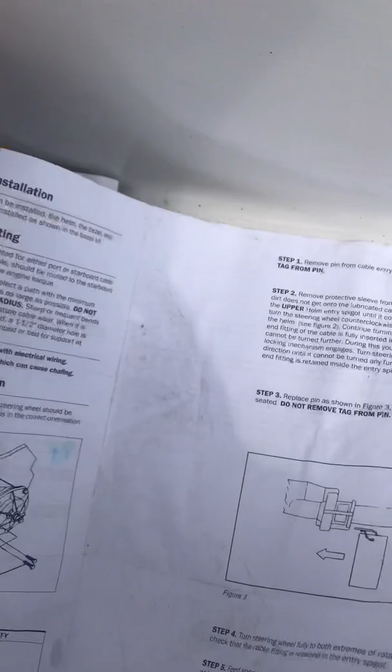Anyway, the instructions are pretty good. It's pretty straightforward installation. You put in the bracket, put in the helm bracket, but where I had trouble was getting the cable to lock into the steering mechanism. There's a pin, and the instructions on the insertion of that pin are not very clear.

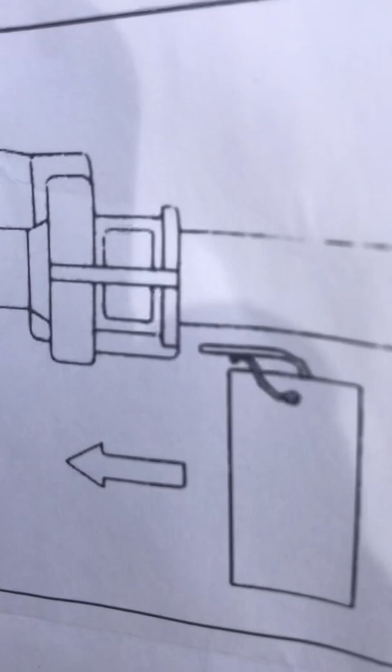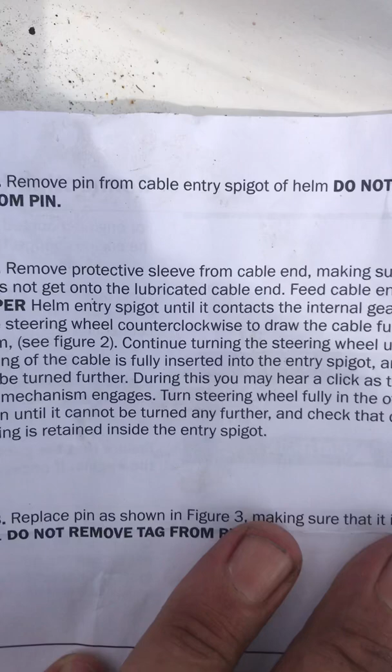But here in step 2, we read: during this procedure of pulling the cable into the helm box, you may hear a click as the locking mechanism engages.

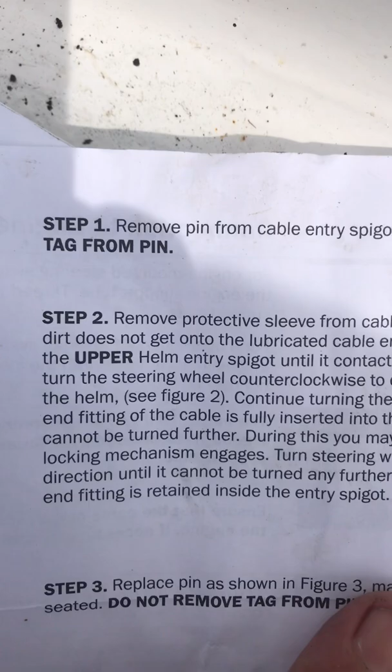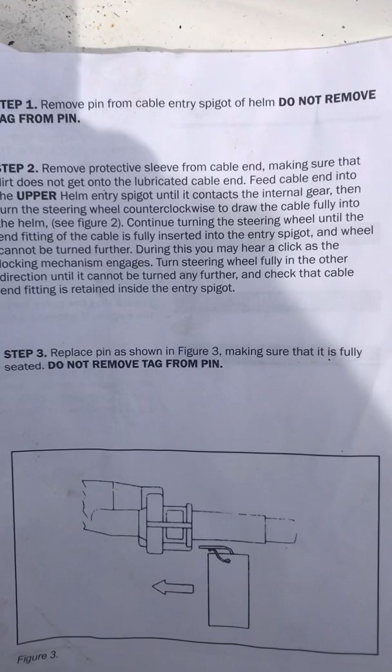So if you don't hear that click, it's not done. So when you're doing this and you're rotating your steering wheel counterclockwise, you're going to put some force on it until you hear that click. If you don't hear the click, then the cable keeps shifting in and out of the helm box.

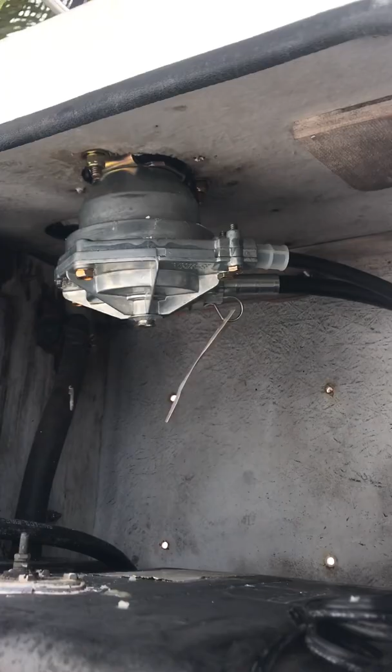And it won't work. So I couldn't find anybody that had done a video for this model, SH5150, SH5155.

So this is the SeaStar Safe-T II installation.

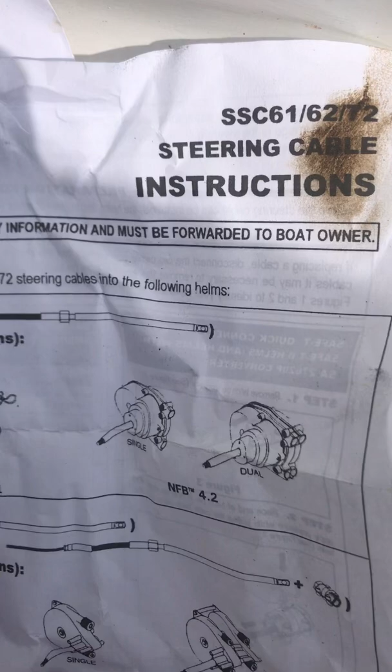You get instructions with the cable, SSC61 and 62, 72, and basically the instructions are exactly the same in both of these manuals, but you'll be able to figure it out very easily.

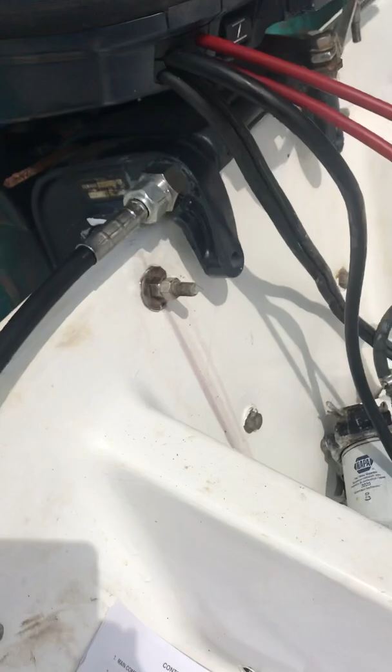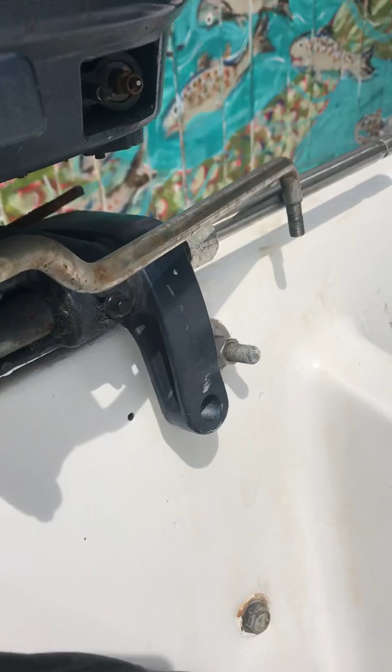And make sure your tube there is nice and clean. I reamed it out, got all the gunk out of it before I reinstalled. Still have to do the final hookup to the engine, but anyway, make sure you do that click.

Hope this helps. We had to figure it out on our own, so maybe the next guy won't have to.